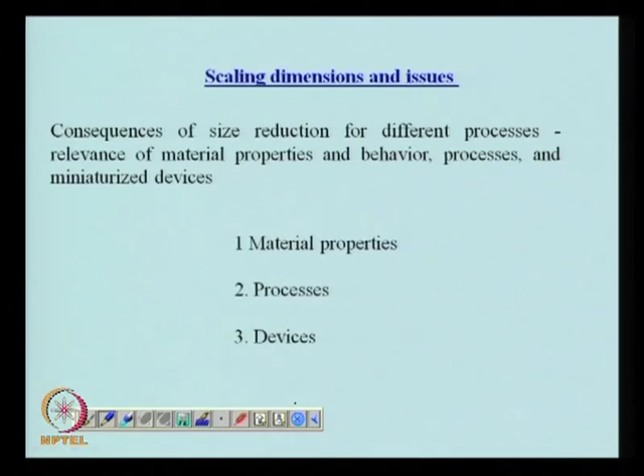Secondly, we would also like to see the processes which come up and are relevant in small systems, and how the efficiencies of these processes are affected by a reduction in size, and the kind of devices that are fabricated which take into account changes in material properties, such as enhanced separation efficiency of a chemical process, and the limitations of such devices. But in today's class, we will mostly concentrate on the material properties, or rather the changes in material properties brought about by a reduction in the dimension of the system.

If we go to our next slide, we can see that with decreasing length, not only do material properties change, but the behavior is affected, which in turn results in a change in the efficiency of many unit operations - fluid flow, heat transfer, or mass transfer - in various devices in different ways.

When we talk about miniaturization of chemical equipment, we generally specify it in terms of reduction in length, but we also require information about how the pressure or temperature in such a small system may vary with time and with position. So we would like to see the effect of reduction in size on such systems.

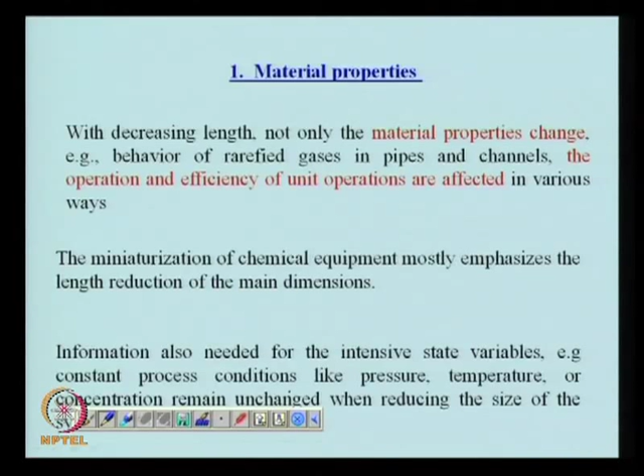The value of the Knudsen number can be used to denote whether we are in the continuum region or in the other extreme, where the molecules of the gas do not interact with each other - a region termed free molecular motion. In free molecular motion, the molecules do not come in contact, they do not collide, and they do not essentially sense the presence of another molecule. So a molecule can traverse the entire dimension of the small device without encountering another molecule in its path. This is characterized by a large value of the Knudsen number.

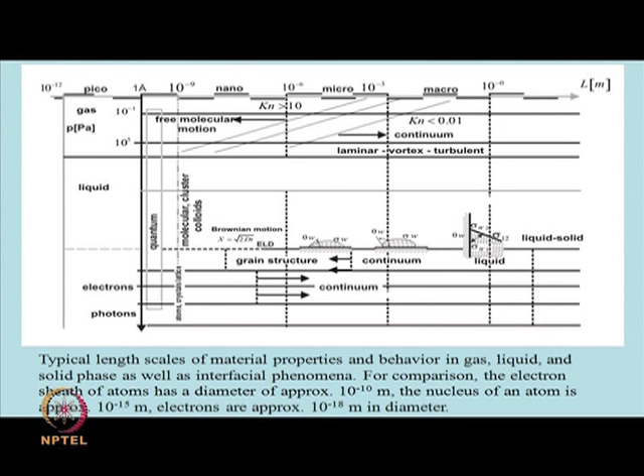In the rest of the slide, we have some information about the sizes and whether it is in the macro scale or in the nano scale, and I think we have discussed this in our previous classes as well, so I will skip this part.

Now, what is continuum hypothesis? If we start reducing the volume of any system, at some point it starts to influence the properties of the fluid, and the measurement of process parameters like density, velocity or temperature will be affected by the reduction in size of the system.

Physical properties and fluid properties are usually treated as being uniform over a control volume. So no matter what the control volume size is, we assume that the physical properties do not change. But if we think of a very large control volume, then you can have spatial or temporal variation of properties.

So at one end of the spectrum, I have a situation in which the physical property or thermophysical conditions, for example pressure, could be widely different from another location, and the best example of such a situation is the atmosphere. The atmosphere is such a large system that you can have variation in pressure depending on where you are. Inside this room the pressure is uniform everywhere, but if you go 10 kilometers from here, the pressure may vary. So for very large systems as well, you may see a change in the properties of the system.

As I said, the behavior of single molecules will become important when we think about variations in properties, also the fluctuations due to the presence or absence of one molecule or a number of molecules in the measurement volume that you have. So if your measurement volume is 1 micron by 1 micron by 1 micron cube, and your pressure is really low, then the number of molecules can vary significantly inside that 1 micron cube, so you may have a fluctuation due to the absence or presence of molecules in such a control volume.

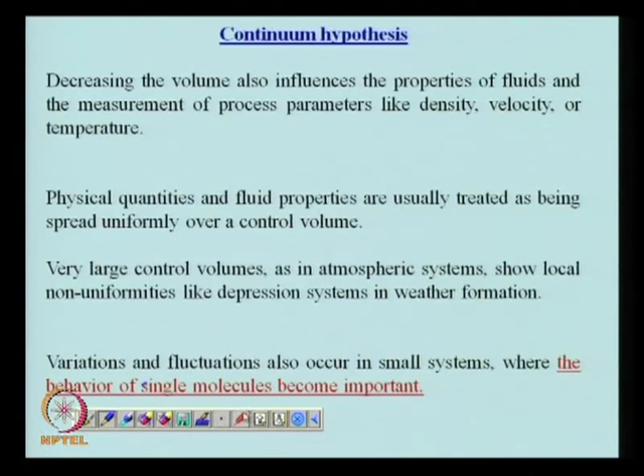So the next figure is what I have already discussed, that you have a very large size effect and a very small size effect. Let's say we are talking about density change as a result of pressure change, and here we have density change as a result of molecular fluctuation. But this is the region that we are normally associated with, where the local value of the fluid density, as you can see, remains constant.

This effect of the size of the sensitive volume on the density is usually measured by an instrument. So depending on the amount of volume necessary to measure a property by the instrument, its reading may vary when you reduce the size of the system.

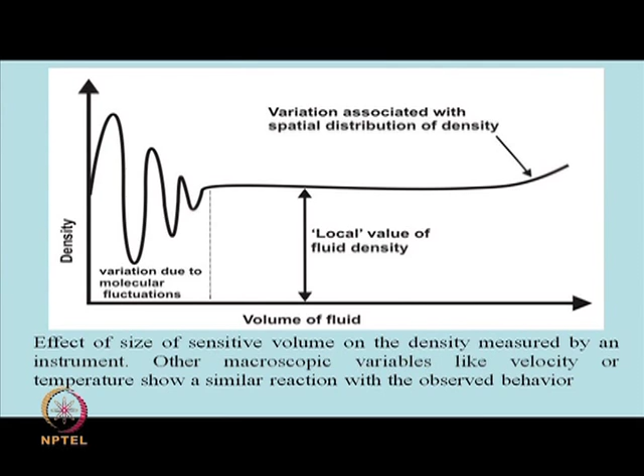And we would see how this is going to affect the continuum hypothesis. So, when we start reducing the volume, the molecular fluctuations would start to disturb the smooth measurement. You are not going to get one value of pressure, but you would rather get a fluctuating pressure that can vary widely from one instant to another.

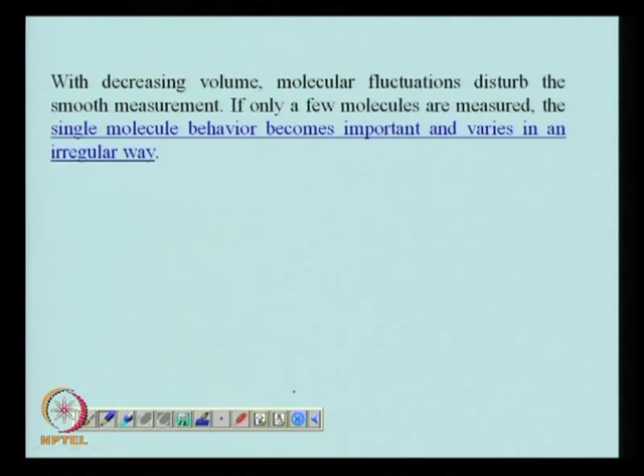So, when you reduce the system to such an extent that you are measuring only a few molecules at a time, then the single molecule behavior will become extremely important and will vary in an irregular way, and we would like to see how we can express such variations using non-conventional approaches other than the continuum assumption.

So, the definition of a continuum is that a fluid can be regarded as a continuum where the fluid properties that you measure will be constant for sensitive volumes, that is the volume necessary to measure that property with the instrument that you are using. And the volume used to measure the property is small on a macroscopic scale, but large on a microscopic scale. So, I would give you an example of what we mean by macroscopically small, but microscopically large.

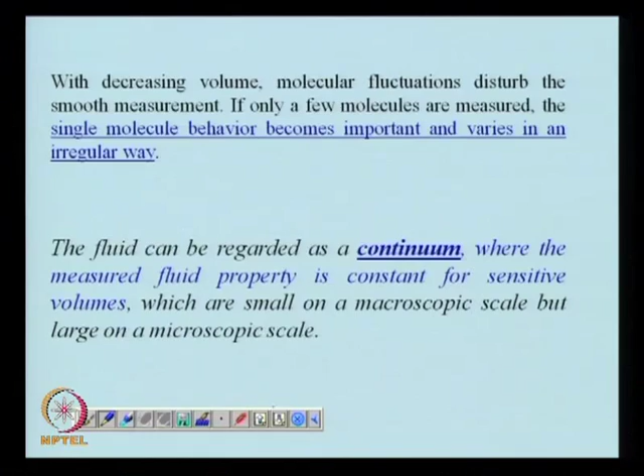Let us say we take air and try to see the number of molecules present in air at normal conditions. So, think about a 10 micron cube instead of the 1 micron cube example I gave you earlier - a cube formed of 10 micron by 10 micron by 10 micron. If you calculate the number of air molecules present in such a cube at normal pressure and temperature, you would see they are of the order of 10 to the power 10. So, it is a huge number of molecules.

So, the effect of molecular fluctuations on any measured property will not be felt if your measurement volume is 10 micron by 10 micron by 10 micron. So, for all practical purposes, these statistical fluctuations are going to be insignificant in such a system at normal pressure and normal temperature. But what happens if we reduce that pressure or the temperature?

That is something - or if we reduce from the micron level to the nanometer level. So, would it still represent a situation in which the properties are going to be independent? Are the sensitive volumes still going to be so large that the number of molecules present in it is going to be very, very large, of the order of 10 to the power 8 and so on?

So here you see the sensitive volume of a 10 micron cube is very small when we think about macroscopic scale, but it is still very large when we think about microscopic scale, because the number of molecules present in such a system is so large.

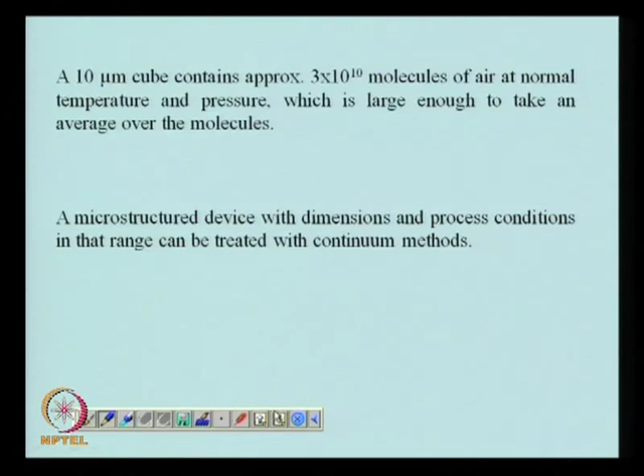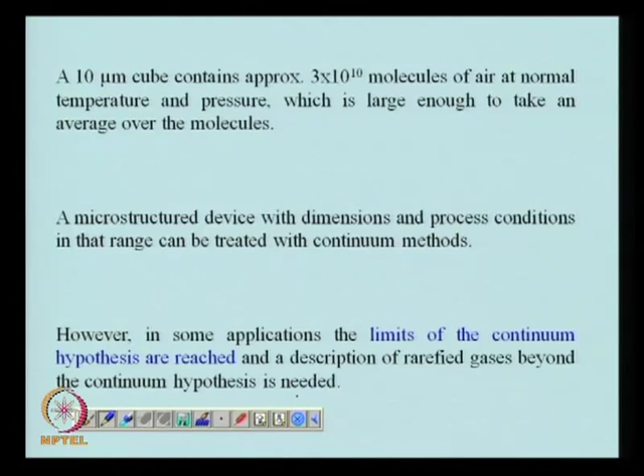But we are more interested in this class in the limits of the continuum hypothesis - where they are going to be reached, where the continuum assumption will not hold good, and a description of the gases which are also termed rarefied gases beyond the continuum hypothesis. So, you would like to see where to draw the line, how to present a quantitative way to decide whether you have reached one limit or the other of continuum.

So, the continuum assumption in fluid mechanics is only valid when you have a sufficient number of molecules present in a given volume, so that you achieve a stable estimate - stable meaning there are no fluctuations of the microscopic or macroscopic flow properties. So, the pressure, temperature, etc., will remain constant throughout your measurement.

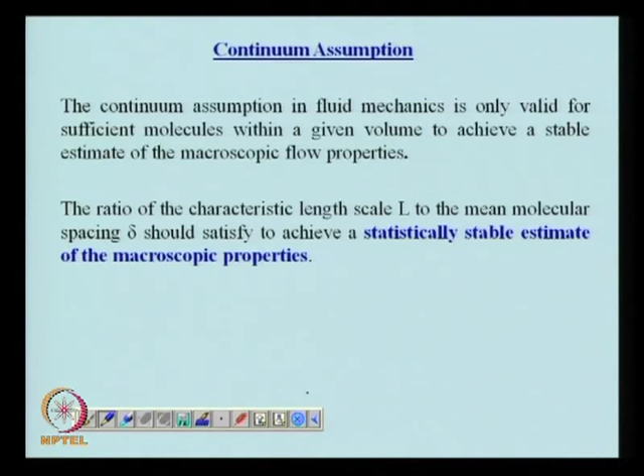So, this length scale that we need - the ratio of the characteristic length scale to the mean molecular spacing - should be large, so as to obtain a statistically stable estimate of macroscopic properties. So, the mean molecular spacing should be quite small compared to the length scale, and it has been found that when L by delta, where L is the characteristic length of the device and delta is the molecular spacing, is greater than certain numbers, then we can assume that we do not have any statistical fluctuations present in the system.

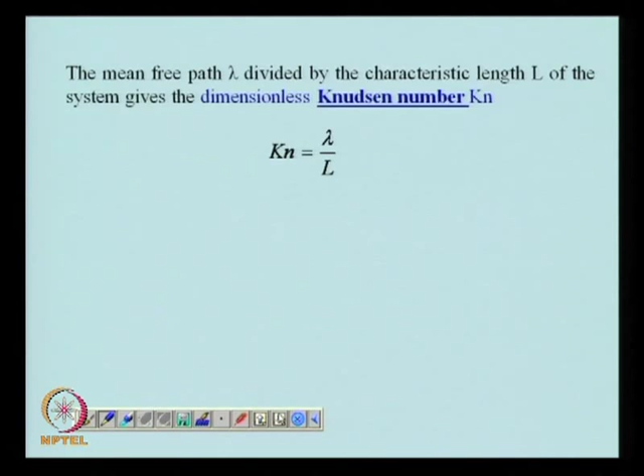Another way to say when we are going to reach the limit of continuum is to define a number called the Knudsen number, defined as the mean free path of the gas molecules divided by the characteristic length of the system. This gives a dimensionless number, the Knudsen number, and depending on its value, one can decide where we are in terms of rarefaction effects on the flow regimes of a gas. For different values of Knudsen number, we can classify the flow regimes to say whether it obeys continuum or not.

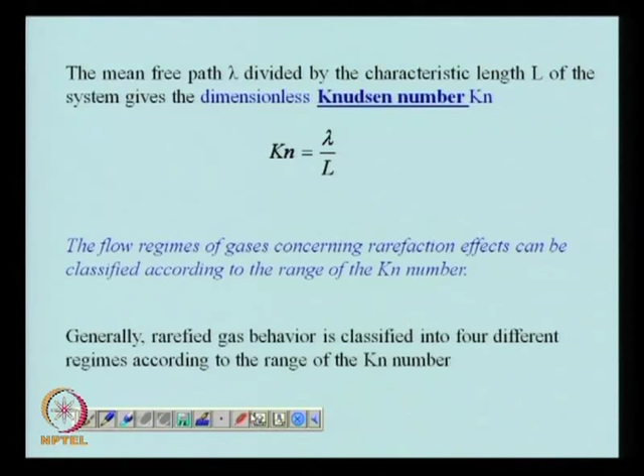For small values of Knudsen number, we have the continuum flow regime, where we can assume properties are more or less constant and the no-slip condition is valid. Between a Knudsen number of 0.01 and 0.1, we have the slip flow regime, which we will discuss in more detail. When the Knudsen number is of the order of 1, you get a transition regime between slip flow and free molecular regime, which is valid for a Knudsen number greater than 10. So in between the free molecular regime and slip flow regime, we have the transition regime.

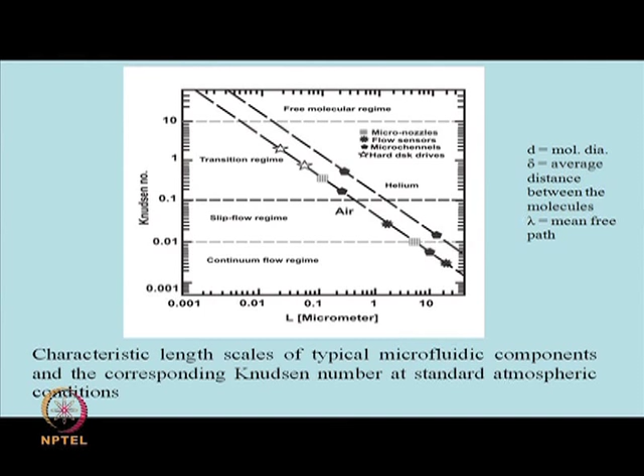Now we will take each one of these regimes one by one, and see what they imply in terms of the applicability of equations we know, or new equations, new methods of measurement, or new modeling approaches needed to describe in detail the flow of a fluid or variation of its properties in such a small system. So we will first start with the situation where Knudsen number is less than 1 times 10 to the power minus 2.

This refers to complete validity of the continuum model. The continuum model says that when you measure a property, it will not vary based on molecular fluctuations. You can use many equations valid for macroscopic systems, such as the Navier-Stokes equation, to describe the flow inside such a small system, and you also have the no-slip boundary condition at the solid-fluid interface. For the energy equation, you can assume without error that the temperature on the solid side of the interface equals the temperature on the fluid side. In other words, temperature is a continuous function even at the interface, without a jump in temperature or pressure at the solid-fluid interface. So any system with Knudsen number less than 10 to the power minus 2 can safely be assumed to follow continuum models, with all equations and boundary conditions normally valid for macroscopic systems.

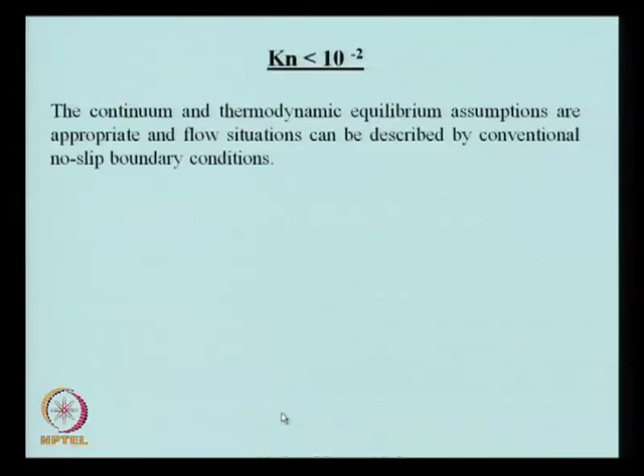Next, we come to the case where Knudsen number is greater than 10 to the power minus 2 but less than 10 to the power minus 1. Here some models, like the Navier-Stokes equation, will still remain valid, even though it cannot truly be said to follow the continuum model completely. Certain alterations or approximations need to be introduced into the Navier-Stokes equation to use it in the slip flow regime. As the name suggests, you have to assume there is a slip between the gas molecules and the solid at the interface.

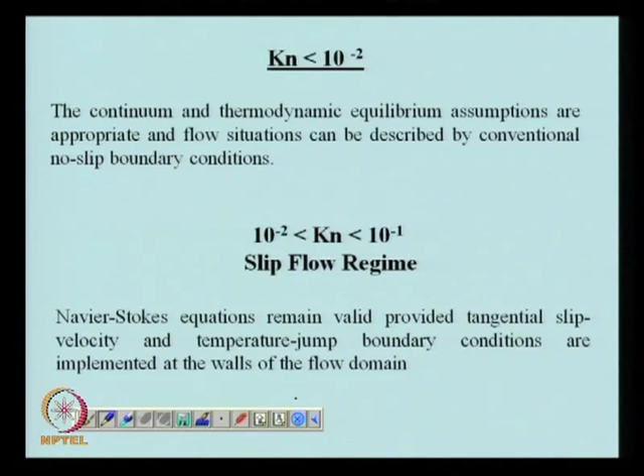As long as a slip model or slip flow is assumed, a temperature jump is assumed at the fluid solid interface, and the Navier-Stokes equation can be used without any problem. This is a very common situation in microfluidic devices, the slip flow regime, and it becomes important when the Knudsen number is in the range between 10 to the power minus 2 to 10 to the power minus 1.

Then comes the third flow regime, known as the transition flow regime. In this situation, the continuum and thermodynamic equilibrium assumptions of the Navier-Stokes equation start to break down, and you need to find alternative analysis methods, such as molecular dynamic simulation or Monte Carlo simulation.

So you will not be able to use continuum models such as the Navier-Stokes equation even with the introduction of slip flow, because not only is the continuum limit exceeded, you also have a breakdown of thermodynamic equilibrium at the interfaces, but still it cannot be called a free molecular flow. So this is transition flow, and it is also quite common in microsystems.

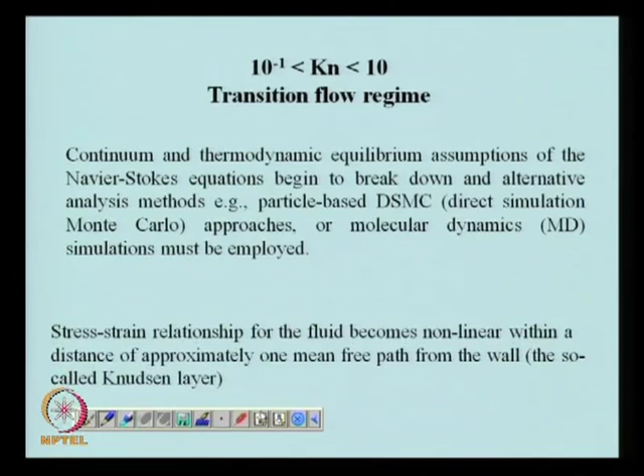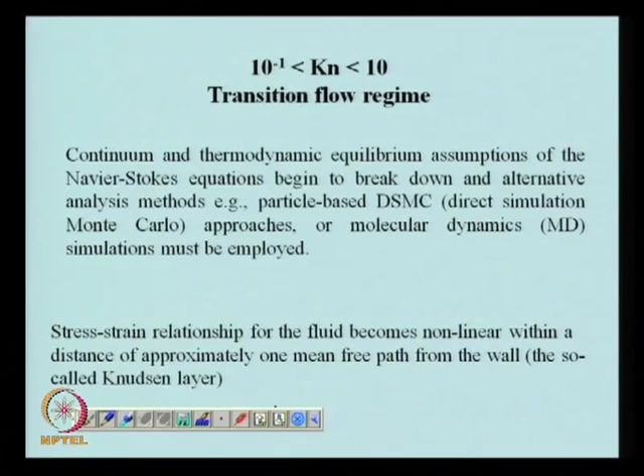Another interesting phenomenon one would come across in such systems is that the stress strain relationship behaves in a nonlinear fashion within a distance of about one mean free path from the wall. This is called the Knudsen layer. If you cross the Knudsen layer, the stress strain relationship will no longer remain linear. This is an additional complication which one has to take into account while modeling flow in the transition regime.

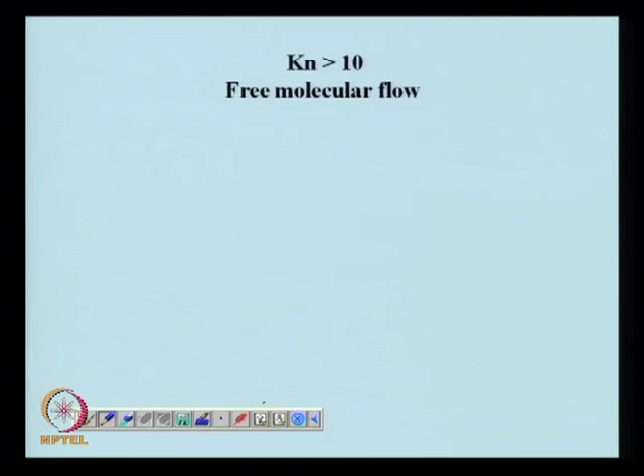Finally, for large values of Knudsen number, we come to a situation known as free molecular flow. Here, the mean free path of the molecules is far greater than the characteristic length scale. Your characteristic length may be 0.1 micron, but your mean free path, because of the pressure and temperature conditions of the gas present in such a micro device, could be 10 micron. So you have a large difference between the size of the system and the mean molecular free path, which will be much more than the size of the system.

Therefore, a molecule which gets reflected from the device surface will reach the other end of the device before it comes in contact with another molecule. That is why it is called the free molecular flow of gases in such a system. As you can clearly see, the continuum approximation has no meaning in situations like this, because you have very few molecules in a device, and compared to the size of the molecule and the separation between molecules, the device length is very small, so that you have very few collisions of molecules in between.

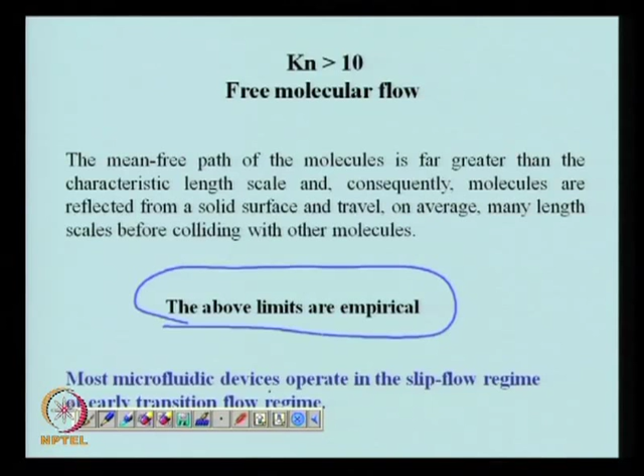Now the question may come up: what is the length scale? Is it the smallest length of a device that is going to be treated as the characteristic length, or is it something else? In order to circumvent the problems associated with the definition of characteristic length, this definition is sometimes used: the property divided by the gradient of the property, which has dimensions of length, is sometimes called the characteristic length.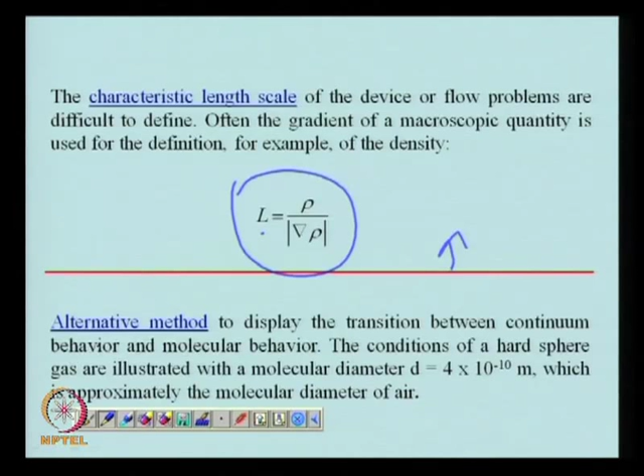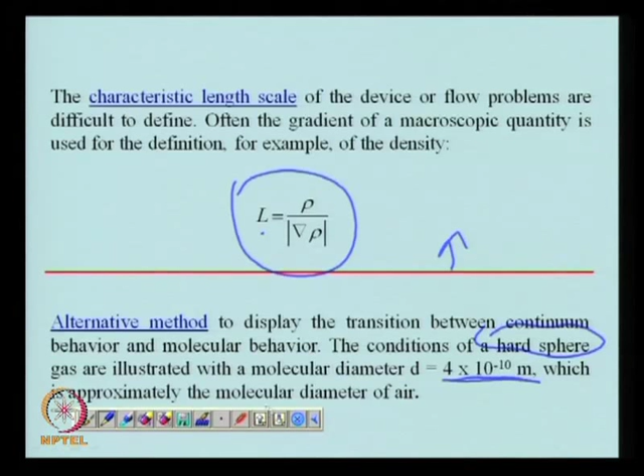For this, let us take an example where we assume a hard sphere gas with a molecular diameter of 4 into 10 to the power minus 10 meter, which is approximately the molecular diameter of air. With that we would plot this chart, which gives us more insight into the process.

On the x axis we have the characteristic length L, defined as it could be the smallest system dimension, or the property divided by the gradient of the property, as I have said before. On the top x axis is the intermolecular spacing normalized by the molecular diameter: delta is the average distance between molecules and d is the molecular diameter. On the right y axis we have the length ratio, L, the system dimension, again normalized by the molecular diameter. These two are the same, one is just length and the other is normalized length.

The bottom x axis shows the variation of a physical property or physical situation, it could be the pressure, or the density normalized by density at some standard condition P0. So here you would see that the flow regime, the nature and condition of the system, is different based on where you are located.

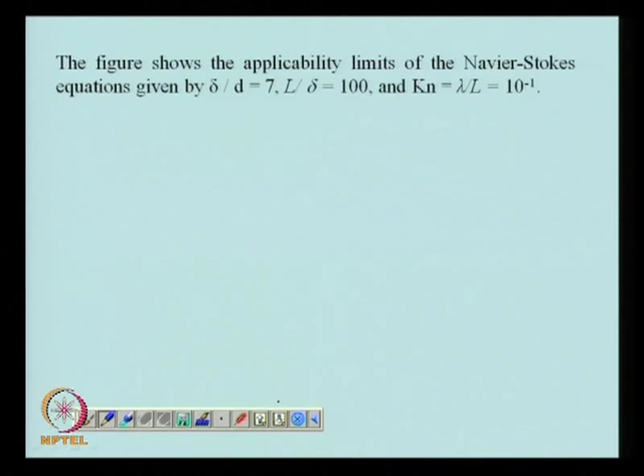This is just a description of what is the x axis, y axis and z axis, and the right x axis and top y axis. Now we see that the zone of applicability of the Navier-Stokes equation is given by delta by d equals 7, L by delta has to be in the upper half of the line corresponding to L by delta, and Knudsen number should be equal to 10 to the power minus 1 or smaller.

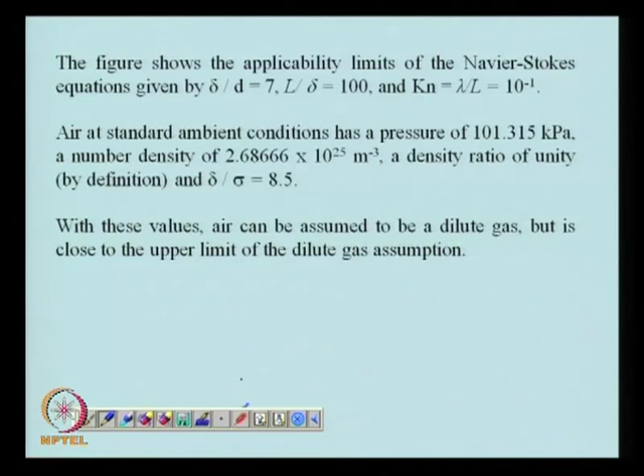If you think of air, you would see that it has a number density at 1 atmosphere pressure of 2.6 into 10 to the power 25 per meter cube, and a delta by sigma ratio which is about 8.5. So with these values one can say that air is a dilute gas, but it is close to the upper limit of the dilute gas assumption.

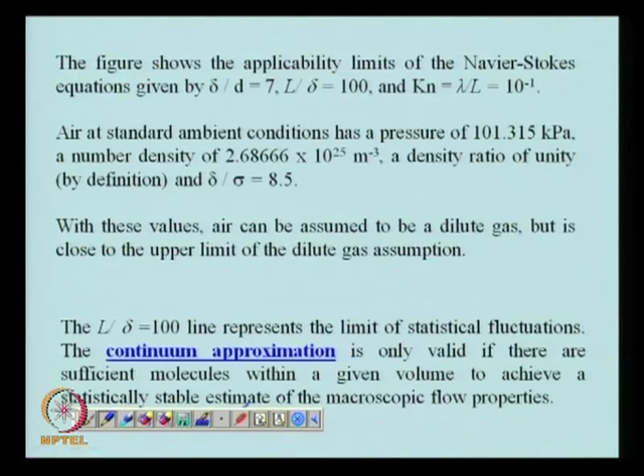And this L by delta equals 100 line represents the limit of statistical fluctuations. You have to have a sufficient number of molecules within a given volume to achieve a statistically stable estimate of the macroscopic flow properties. So, in order for the continuum approximation to be valid, your system or conditions should be such that your L by delta is above that 100 mark line.

That means your L by delta should be above this line. You cannot see it over here, but it simply tells you that this is the condition that needs to be maintained for you to use the continuum approximation - this side of the line, this side of the line, and this side of the line. So it essentially gives you more or less this being the region where the continuum approximation is going to be valid.

There are certain other interesting things you would see, that if you are a dilute gas, if your situation is over here, and you keep on reducing the size of the system, then the first problem you are going to encounter in using continuum approximation is that your thermodynamic equilibrium is going to be violated, and then you are going to come to this point where there would be significant statistical fluctuation in the properties. That is how a dilute gas behaves when you reduce the system size.

On the other hand, if you start with a dense gas, then you are going to cross this limit first, that is, the statistical fluctuation limit is going to be crossed first, and then you are going to come to the thermodynamic limit. So for dilute gas, it is the thermodynamic equilibrium condition which would be violated first, whereas for the case of dense gas, it is the molecular fluctuation which is going to be violated first. So this is how the two systems will behave differently.

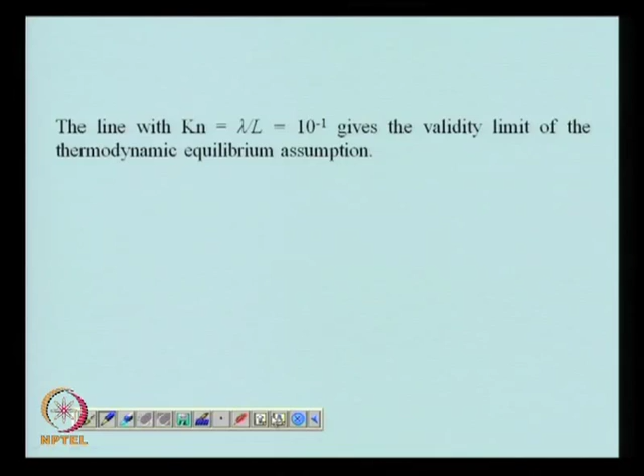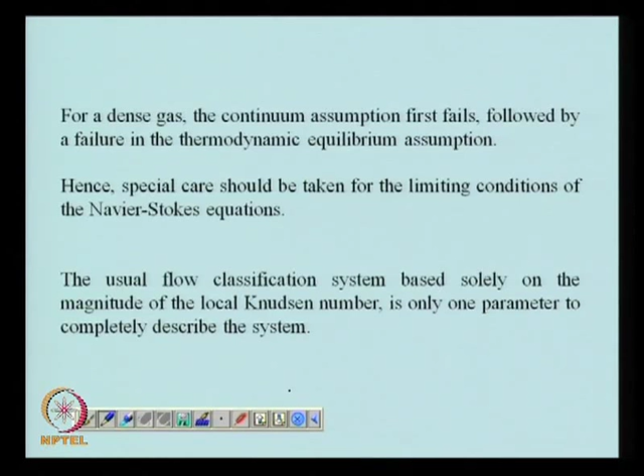So one should take special care for the limiting conditions, to use the limiting conditions of the Navier-Stokes equation. As you can see now, the magnitude of the Knudsen number is just one parameter, one of the many parameters, one of the 4 or 5 parameters which I have mentioned, that describes the nature of the system. Now we come to our next part, which is the statistical mechanics and mean free path.

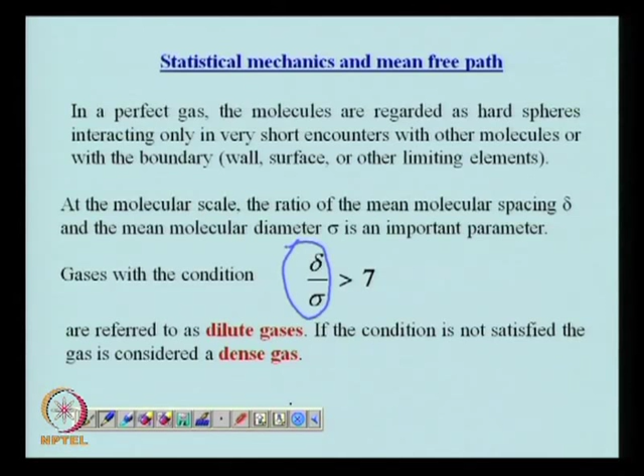Usually gases with the condition delta by sigma greater than 7, where delta is the mean molecular spacing and sigma is the mean molecular diameter, this is going to be an important number, delta by sigma. Gases with the condition delta by sigma greater than 7 are treated as dilute gases, and if the condition is not satisfied, then the gas is called a dense gas. So air at standard conditions it's regarded as dilute, it can be shown to be a dilute gas, but at higher pressure it is going to behave as a dense gas.

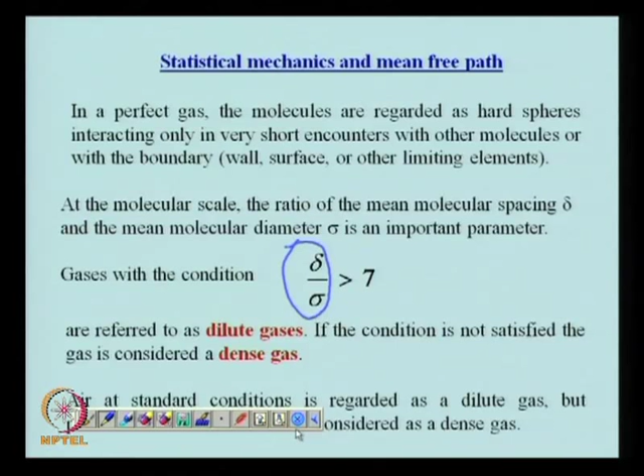Now, it is assumed that the probability of the molecule moving in a certain direction is equal in all space coordinates.

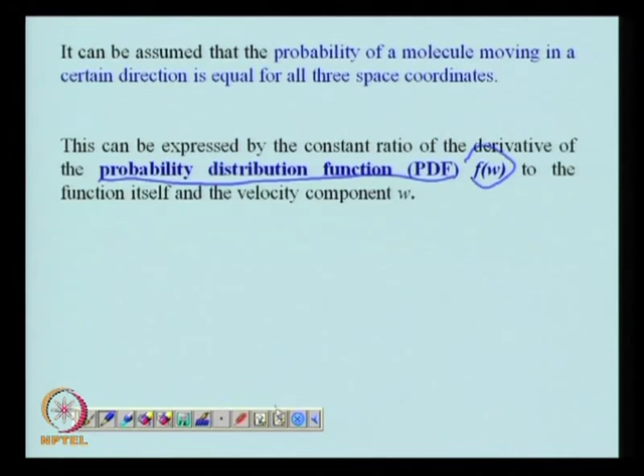That can only be true if this important parameter, probability distribution function, or PDF, denoted by f(w), has the derivative of the probability distribution function to the function itself and the velocity component expressed in this form. In other words, the ratio of the derivative of the distribution function to the function itself, and the velocity, if this ratio can be a constant, which for convenience we express as minus 2 gamma, then the probability of a molecule moving in a certain direction is equal in all three space coordinates.

So for this assumption to be valid, the derivative of the probability distribution function to the function itself, and the component of velocity in any direction, would have to be a constant, and on integration one can obtain this relation between the probability distribution function and the velocity in that component, where c is the constant of integration.

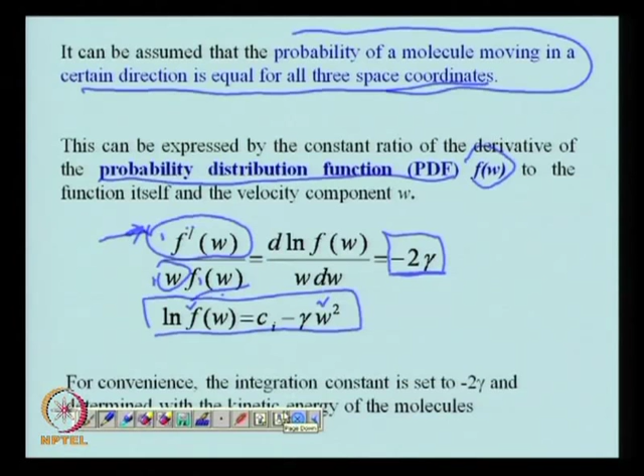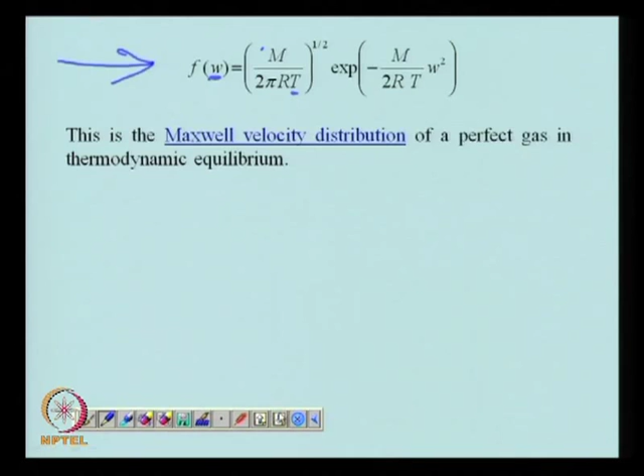Now, if you integrate this probability distribution function in all 3 space coordinates, it gives the probability of the absolute velocity. So this is the probability of the velocity in one component, whereas c is the absolute velocity, or the probability of the absolute velocity, which is independent of direction. This expression is the probability of the absolute velocity of a perfect gas which is in thermodynamic equilibrium.

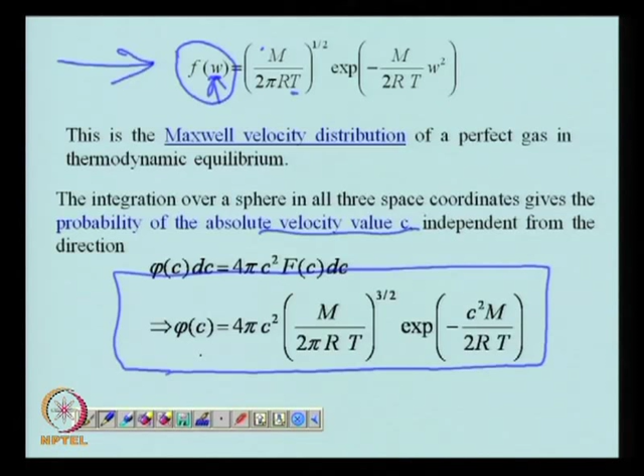This is extremely useful in some of the calculations, especially when they are used in conditions where the continuum approximation may not be valid.

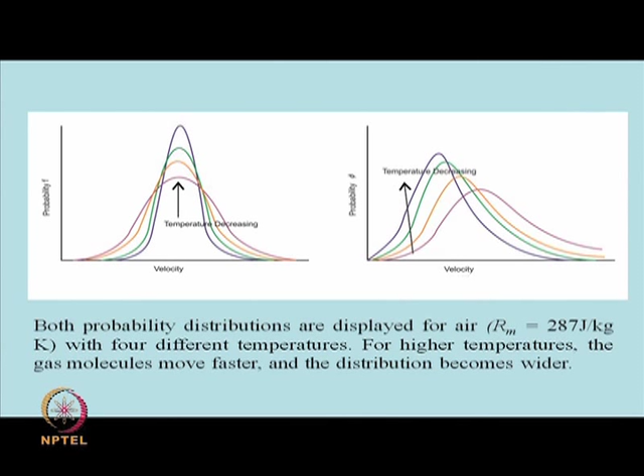There are certain velocities, 2 or 3 different definitions of velocity, which one has to know for the case of air, or for any gas.

The most probable velocity is denoted as Cm, which can be expressed as root over 2RT by m. R is the gas constant, T is the absolute temperature, and m is the mass of the gas. So this is the most probable velocity of a molecule.

The most probable velocity of a molecule can be obtained by differentiating the probability density distribution and finding where it has the maximum. So wherever you have the maximum probability, the velocity that you obtain at that point is known as the most probable velocity of a molecule.

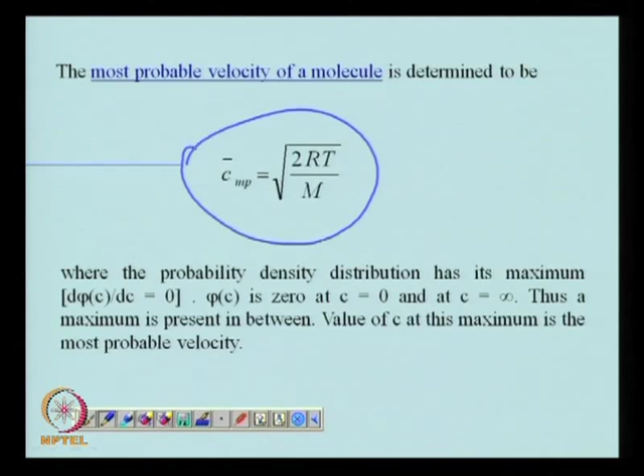Now, if you see the distribution of phi c, it is equal to 0 at c equal to 0 and at c equal to infinity. So somewhere in between there is a maximum, and that value of velocity at this maximum is denoted as the most probable velocity.

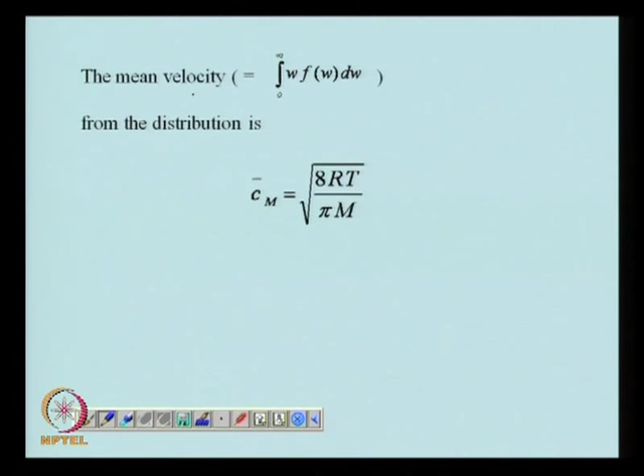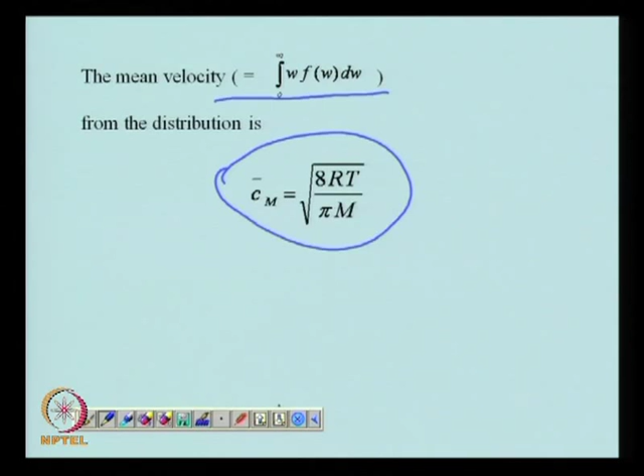You also have something called the mean velocity, which can be obtained as given in the formula, and the distribution is 8 by pi. When you compare this mean velocity with that predicted from the kinetic theory, you find they are essentially the same, the only difference being 3 versus 8 by pi. So you can express it either in terms of probability distribution or in terms of kinetic theory, and the mean velocity can be obtained as this.

So this model essentially provides us with a frequency at which the molecules are going to collide, the distance travelled between collisions, and the transport properties of gases.

There is something else to see: the effect of temperature. As temperature increases, the velocities increase—we know from kinetic theory that increasing temperature energizes the molecules, so they move faster with more kinetic energy, and the time of collision would also be less, since the value of W is going to be more. So the time difference between collisions is going to be small at higher temperatures, and so on. This is physically consistent with our understanding, and it gives us a compact expression to calculate the velocities of the molecules at a certain temperature under certain conditions.

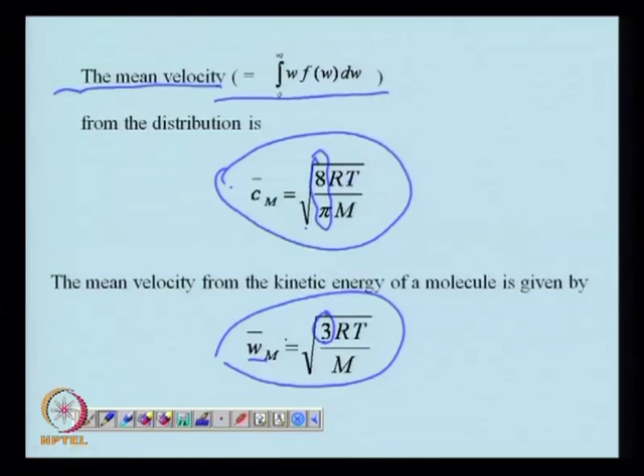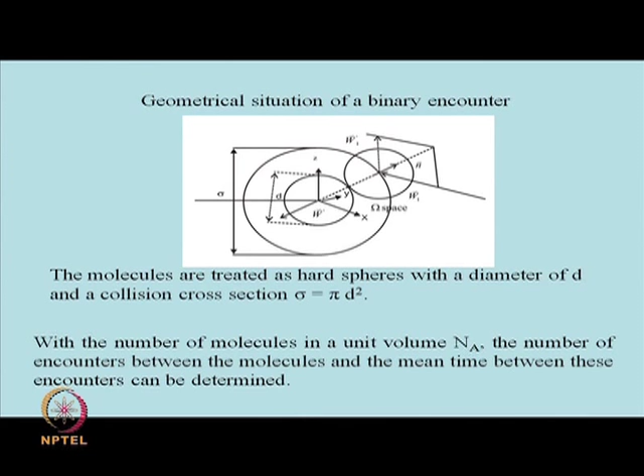Finally, there is one more model you're probably aware of: treating the molecules as hard spheres. We look at the binary encounter of one molecule with another, specify the number of molecules in a unit volume, and calculate the number of encounters between molecules and the mean free path and mean time between these encounters. One can obtain the relation for the average length between two collisions using the expressions for the mean free path.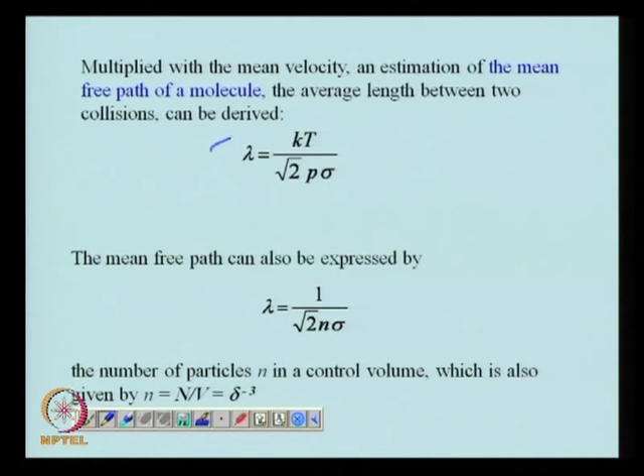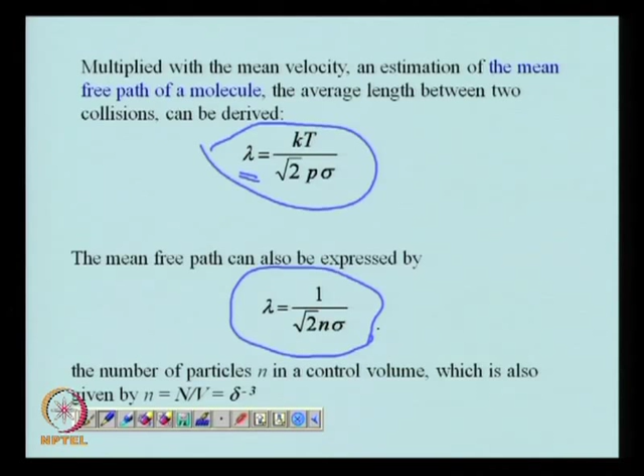Here lambda is the average length between collisions, and it can also be expressed in this form. These are again very useful relations that tell us the interrelation between conditions in the gas, the size of the gas, and the concept of mean free path in kinetic theory—extremely important, especially when analyzing the free molecular flow regime.

Finally, when we know the mean free path of the particle and the mean velocity of the particles between two collisions, the characteristic time between two collisions can be evaluated. As you can see, the collision time is proportional to the square root of temperature and inversely proportional to the pressure.

To summarize what we've covered in this class: it's extremely important to know where exactly our system is in terms of its adherence to the continuum flow condition. When the length dimensions are reduced, the properties may fluctuate. The thermodynamic equilibrium conditions, which are imperative in the Navier-Stokes equation—one of the continuum models—are going to be violated. So sometimes we try to decide about the condition of a system based on one parameter only, which is the Knudsen number.

But the value of Knudsen number, though indicative of the condition of the system, does not give the complete picture. Smaller values of Knudsen number tell us the system is closer to the continuum condition, whereas a Knudsen number greater than 10 tells us it's a free molecular flow situation. Besides that, we also have to look at the value of L by delta—if it's less than 100, the statistical fluctuations due to the presence of individual molecules will be significant.

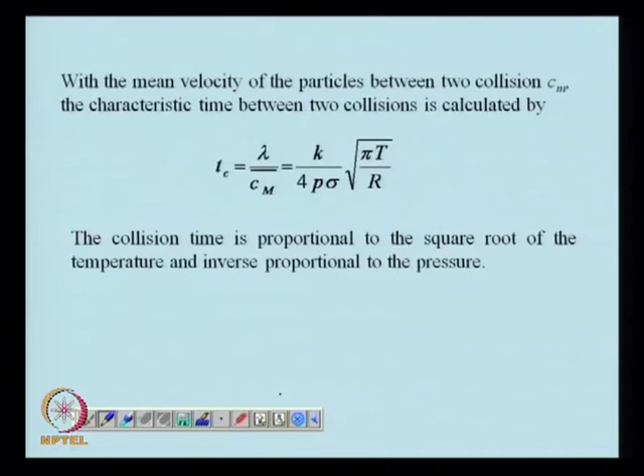When we think of the figure I've shown you, it's marked by a specific region in which the molecule can be treated as obeying the continuum law. So one has to see whether it is a dense gas or a dilute gas, and look at various situations. Let me go back to that graph before I conclude today's lecture. One has to see where they are located, and the region would be above this thermodynamic equilibrium line—it should be this region.

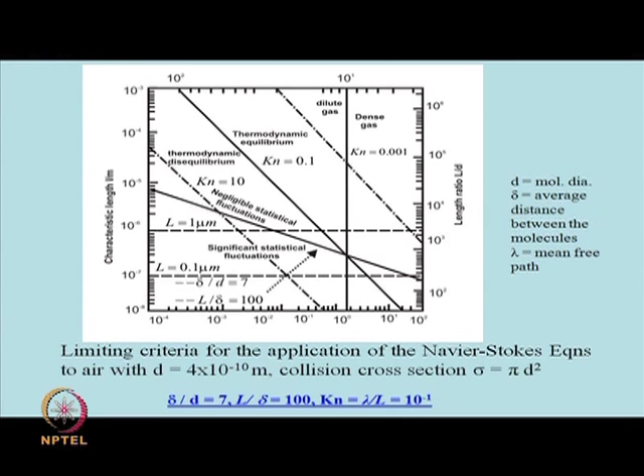You have to be above this line. This is the region which roughly tells us whether or not the continuum flow model is going to be valid. There are different ways to treat systems: slip flow, the transition between slip flow and free molecular flow, and free molecular flow itself.

So finally, looking at the statistical distribution of velocities in a system, we obtained the expressions for the most probable velocity and for the collision time between two molecules, and we saw how these vary as a function of temperature and other parameters of the system. This gives us a picture of the scaling dimensions, where the effect on material properties is significant based on the size and the pressure-temperature conditions of the gases present. Thank you.